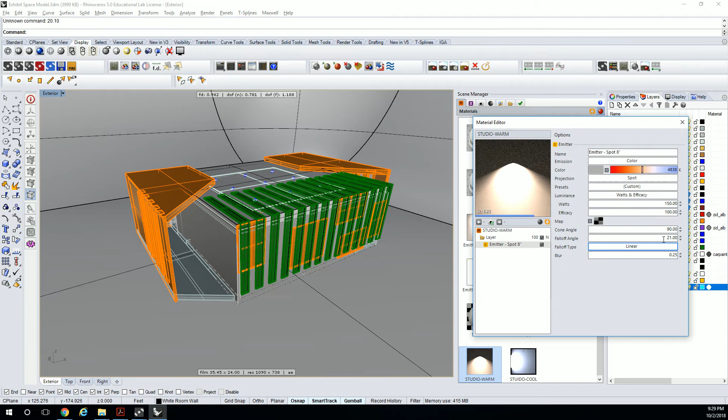And that's really going to open it up and make it almost like a floodlight, but not quite as much. The fall off angle, I'm going to increase to 20, something like 20. And that's going to create a softer edge around the outside of it. Blur, I actually don't really know precisely how blur is affected. I don't think it's going to be super critical in our application. So let's just leave it at something like this, 150, 100, 90, 21, and 0.25. Should be an okay condition for us.

So what I'm going to do then is replace this panel. I'm going to keep a copy of it back here. But I'm going to replace this panel with a Rhino spot. So I've got my white wash light at the top. Then I've got the cool accent light on the right-hand side. And I'm going to have that flood coming in from the left-hand side that should be a little bit more intense. And let me play with how it actually reacts with the building a little bit more.

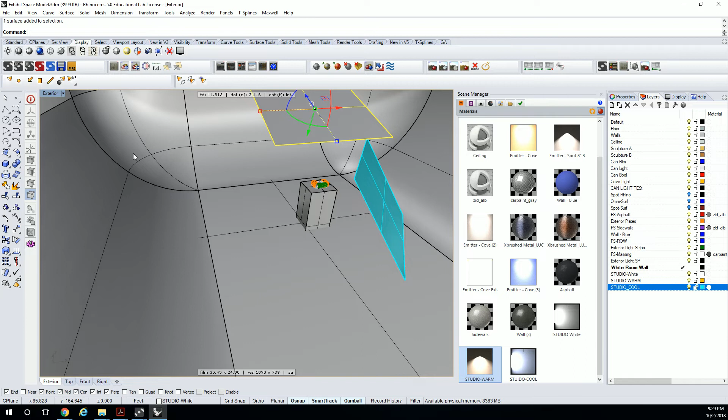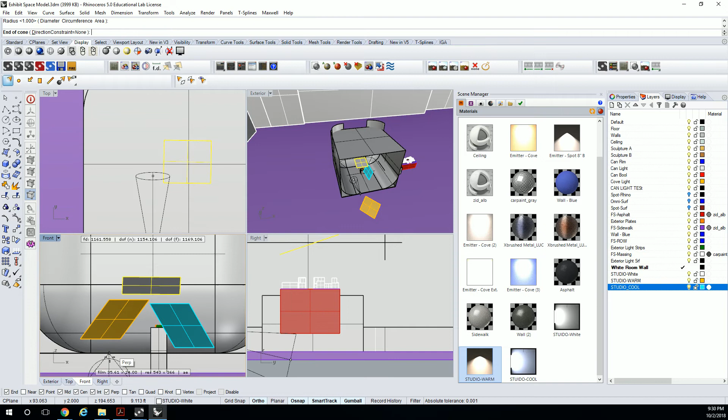So let's go and grab our spotlight family. What I like to do for the spotlight family is do it in orthogonal and place it roughly where I want to place it. So I'm going to put it somewhere like here. And the wider I go, I think it'll matter. And then just pull it up a little bit. So I want it to be kind of a wash, so I don't want the cone to be too tight. So I'll pull it up here. Yeah, actually this is probably pretty appropriate.

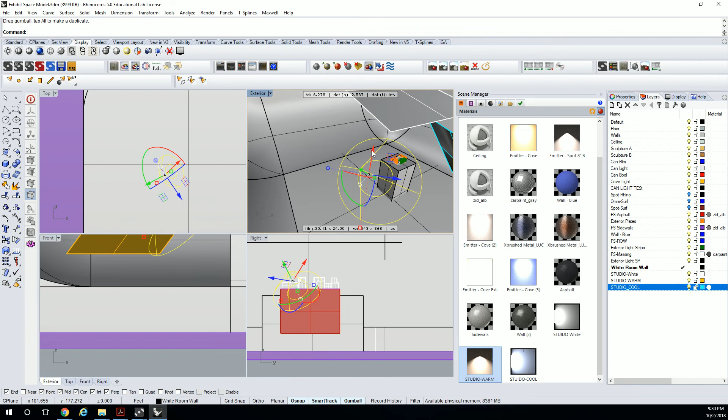So let me spin this around so that I can just tilt this into it like that. So when you get behind it, it should actually shine at the thing. So let me do a little bit of the red. And then get that green one in there. And if you're really struggling to get it in position, you could always just draw the axis you want it on too, but you don't have to. Actually, I want this to be a little further out. Yeah, let's give that a shot.

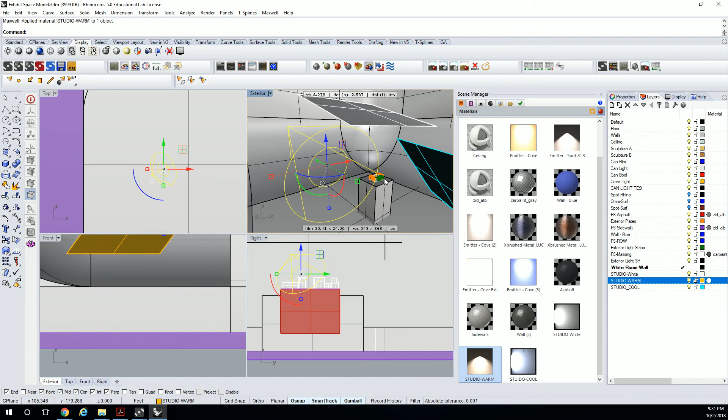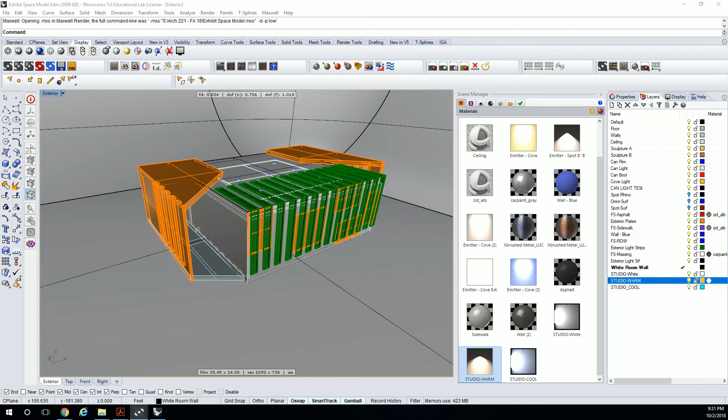So this, then I'm going to change onto Studio Warm. And then when you select the object, make sure you assign that material to it. Assign to selected. Let me grab my model. Set up my camera again. Something like this. It's a little intense, but that should work. Okay, and then I'll do a test render and we'll start playing around with it. Let me give it a couple minutes so that we can actually see it. I'm also going to clear my other renders too. I have a bunch of them on.

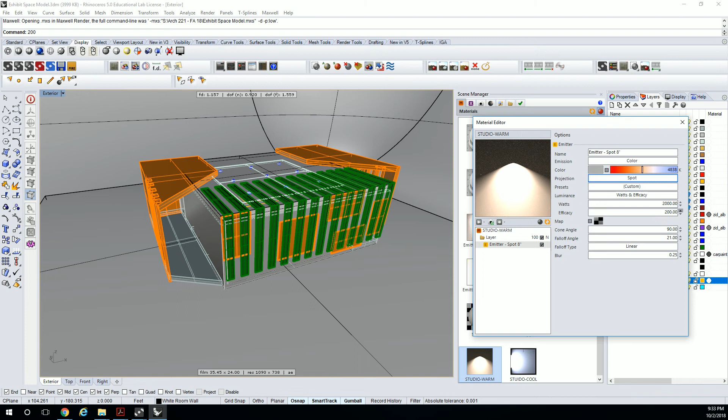So I'm going to bump it up to 2,000. What that does is when you get into your multi-light setting, it'll just go from 0 to like 10,000 or something like that, or it calibrates with the size that you start with. I think we could also increase the efficacy too, and that's going to allow it to wash further into the space. Even though you can't see it in the preview, we've got a stronger light that floods the space a lot more now. So let's go back into render, and we'll check in back in the video here in a second.

Okay, so to wrap up, just a couple of observations. I do kind of like the way it's turning out. Some of the lighting is sort of what I intended. It's getting a little close. If you look down at the preview, I wish this thing could be made bigger, but it's not. But if you look down at the preview, you could always increase the white light above and it'll get brighter, which you could do. But then some of the other lights might burn out if you do that.

The warm light on the side can be increased, and you're going to have this sunlighty sort of glow on the left-hand side. The preview makes it look a lot more intense than it's been turning out in the actual render. And then you could always cool off the right-hand side by increasing the studio cool side. So that's the intent here.

I like the result because it actually does look like a model put in a studio, which is kind of neat. I would need to change the reflectivity and probably the roughness of the metallic material I used, because it doesn't really work at this scale, for it to feel a little bit more appropriate when I re-render it later. But other than that, that's kind of the intent here.

So the model's a little bit smaller, the focal distance is a little bit larger, so I didn't quite nail the depth of field that I wanted to get. So if I'm doing it again, I'd probably go back and decrease the f-stop, go a little bit smaller, maybe like a 4 or something like that rather than a 15, because of how far away I am from the focal point and all that stuff. Other than that, what questions do you have?